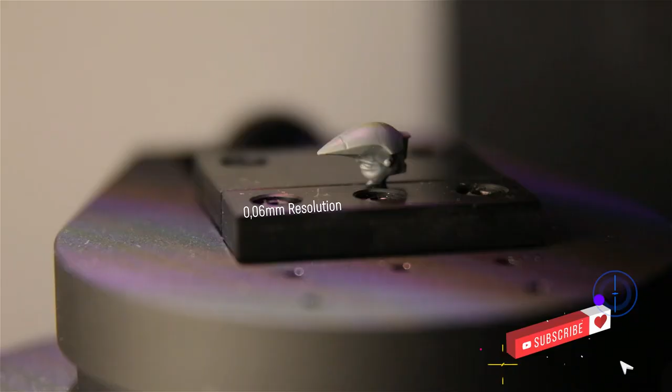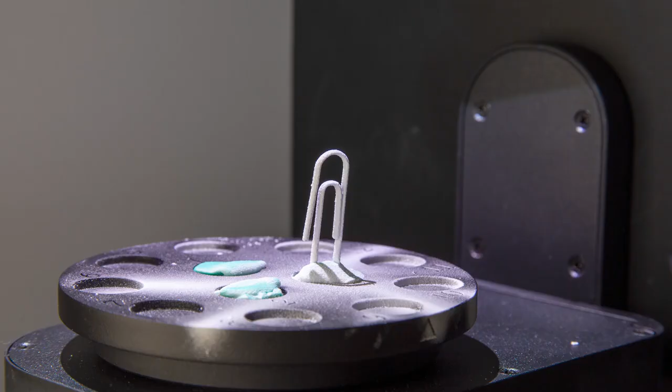Alright, so those are some really impressive specs, but how does that actually translate? I mean, what does even 0.06 millimeters mean in resolution? This here is a paperclip, it's a tiny part. I have some putty here, I'll get you some close-ups. And here you can see the actual zoom in of the object. Notice how I have sprayed some contrast spray on it.

So this is during the scan, sped up by 10x, but it shows the different angles that you're scanning, and here's the final result. I mean, this is insane, the details. This is 11 millimeters wide.

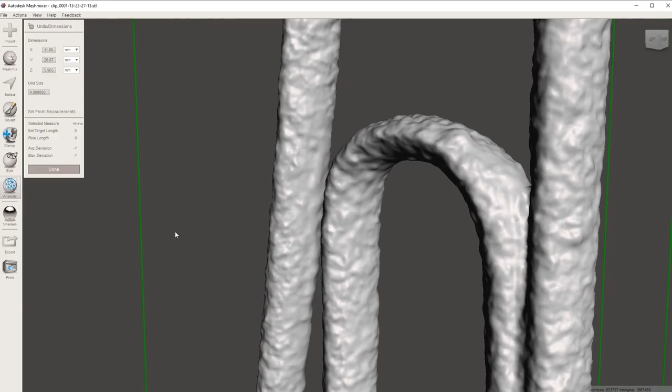But as you can see, when I'm using the contrast spray, it actually puts some dust on the model, and you don't see that in other types of scanners. But here you can see on the close-ups that we actually see the grains of the spray being translated in the scan. It's insane.

Okay, so before we play around even more, let's just have a brief look at how it actually works when it's scanning. So this scanner is a stationary scanner, it has everything built in.

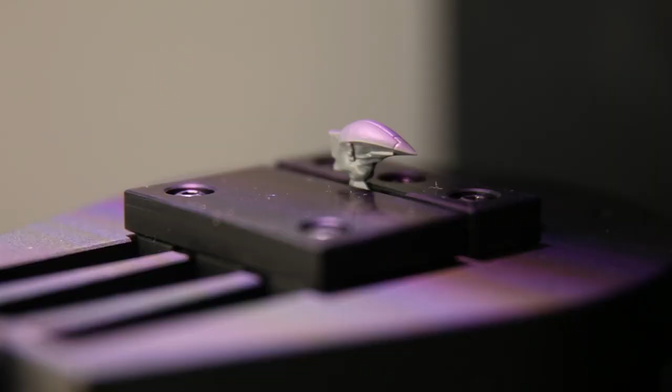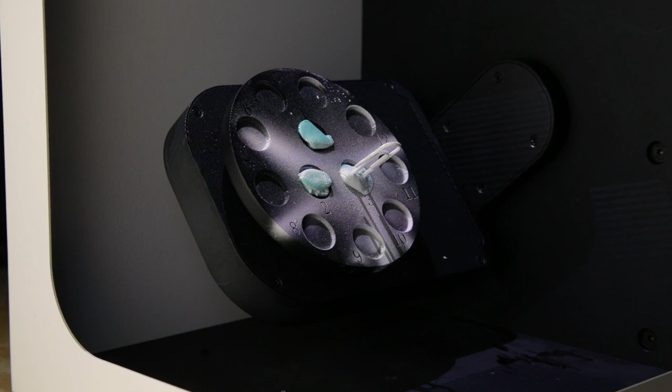You basically put your objects on this tiny vise or this plate with several locations, you can see they're even marked. The machine will then rotate your part, as you can see here, and it will use structured light using the DLP projector. The structured light will create a pattern on the object that two really high-resolution zoomed-in cameras will have a look at, and then it creates different 3D images from different angles.

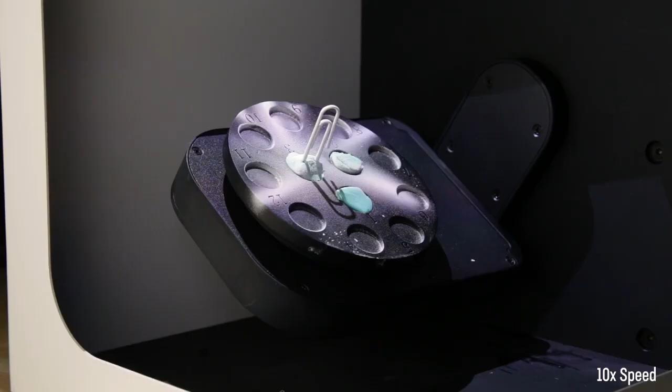What's nice about this is that the scanner actually turns the part around for you, so you don't have to think about moving the scanner or moving the part around, the scanner does all that for you. So all of these 3D images are basically just 3D data, 3D points. And at the later stages in the scan, you can combine these into a mesh file, so an STL or OBJ file, for example. Now, if you're used to 3D scanning or have heard about it before, you might know that the files are actually only meshes.

You don't get a finished CAD file that you can take into Fusion or SolidWorks to actually work with. You get a mesh file, like STL, PLY, or OBJ. Usually that's a bad thing because it means you don't have the technical capability of working with a solid model, but in this case I think it's actually pretty good. It's good enough for what a designer needs.

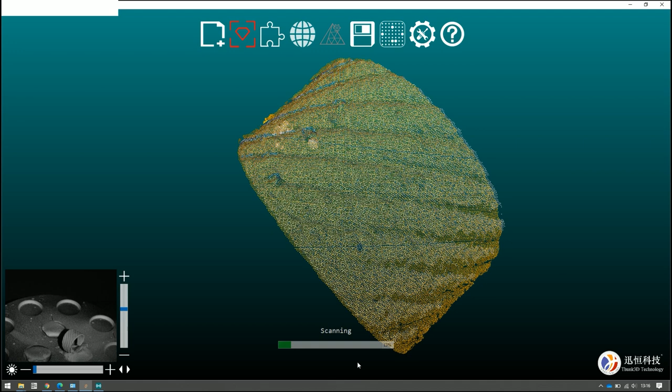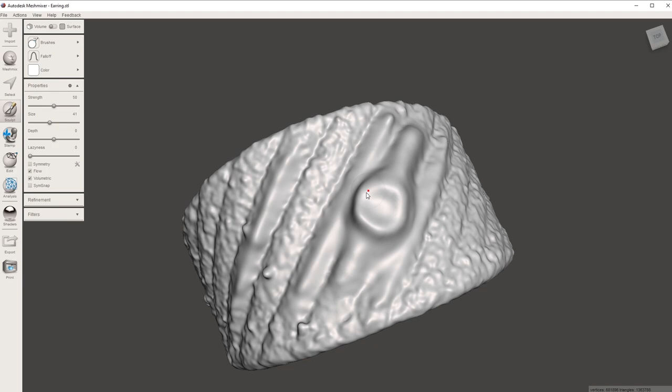For example, if you have a jewelry model, you can take that high resolution mesh into a sculpting program. You take the original real world object and start to sculpt on that. Instead of actually grinding on the part, you can try out your design and save different versions where you sculpt it differently. You take your base design and add different features using sculpting tools, which I think is much more connected to how designers usually work with clay, adding and grinding off material.

I think that's much easier than learning an organic CAD modeling software. I'll probably do much more of this kind of sculpting in the full review, but I just want to introduce it as a concept.

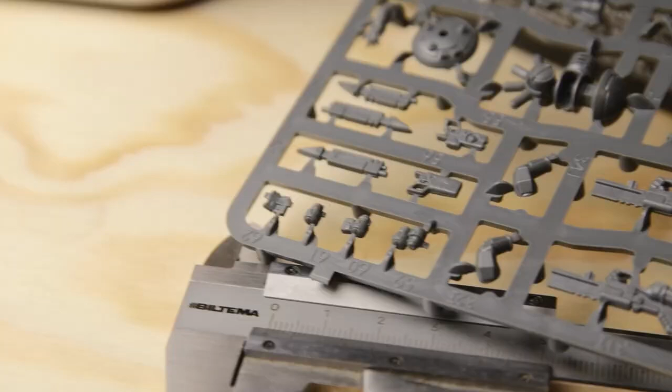These are really tiny plastic models, the unbuilt Warhammer 40k figurines. You can see a few of them here. They're usually around 20 millimeters tall. I'm pretty sure this scanner can scan these objects and actually allow me to create copies.

So I could then 3D print my own figurines and maybe even do some reposing. In Blender, you have tools to rig a character and animate it using bones. I should be able to take one of these characters, add bones to the arms and head, and then make them run or just repose. I get 10 models in this kit, but in theory I could 3D print unlimited different positions, aiming at different locations, turning the head around, or even adding details to these small figurines.

So that's a separate video, and I think that's going to be super cool. Hey, I can't leave you with just that - I think we should at least try some of these parts and see how we can actually scan them.

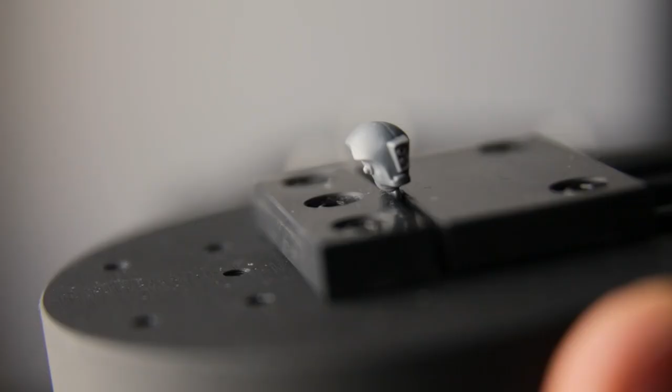So I've loaded up this tiny vise here. I don't even think you can see it from this distance, so let's zoom in a little bit. This here is the head of one of these characters, one of these figurines. It's around 13 millimeters long, and the smallest details on the front are less than a millimeter in diameter. So let's check out how this scans.

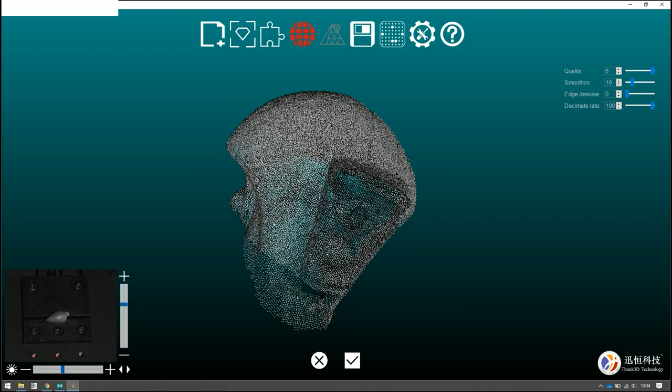Okay, I think I have to stop there. I just wanted to show you and tease you a little bit about the scanner, and I really want your ideas on what I can try out for the full review.

I'm going to continue working with this over the holidays, and hopefully starting in January I'll be able to finish the full review. So I'm really looking forward to ideas of what to scan - let me know what you think, and let me know if you have any other cool ideas for the Warhammer figurines.